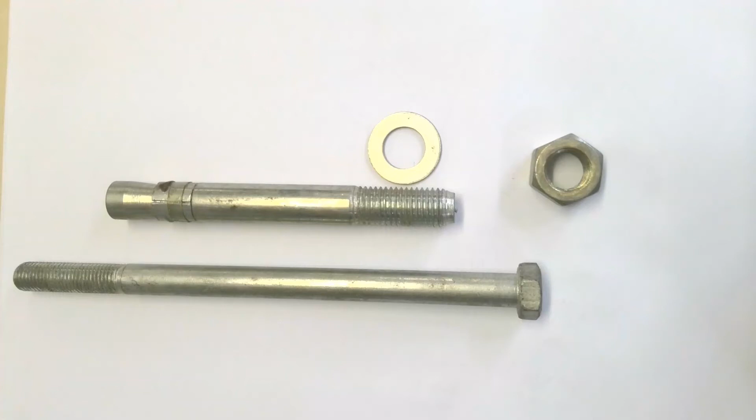Fasteners for assembly drawing. There is a substantial amount of knowledge needed before you can assemble a drawing. Let's go back to our grade 11 work, which is what we're looking at the moment. Remember, all of this assembly drawing is supposed to be in first angle orthographic projection.

So we need to be familiar with all of that. Now, looking at these fasteners, which we are going to engage with before we start the actual drawing, we need to look at the washer, the nut, the bolt, the bolt head, and the threads. Let us start with the washer.

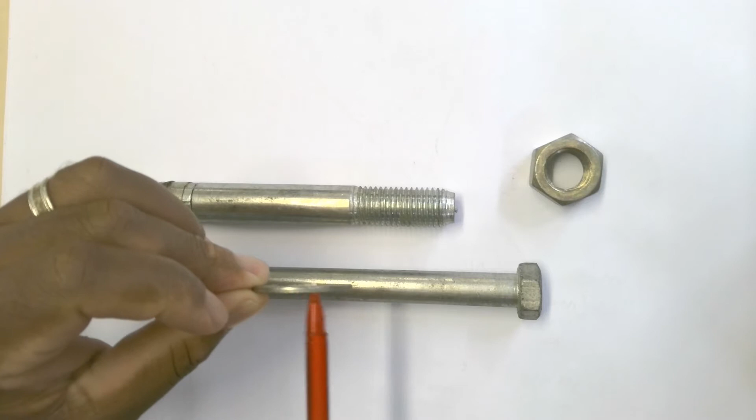If you notice here, the washer has a hole which needs to fit or go through the bolt. That's the washer. And we have the nut again. Now the nut has threads which we call female internal threads. These threads must fit into the male external thread, which is your bolt.

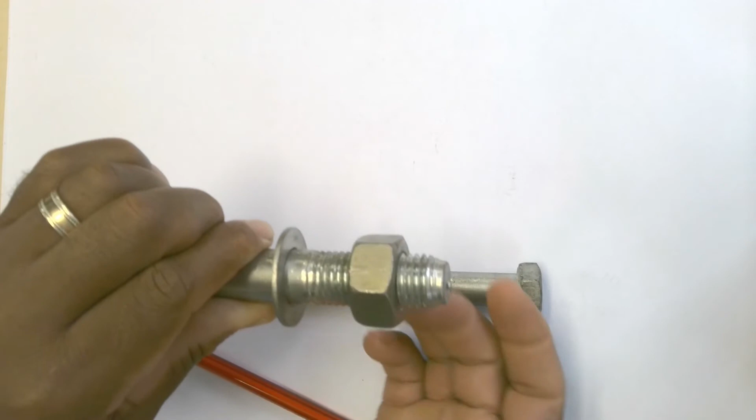How so? We first put in the washer, then we bring in the nut so that it fits onto our male external thread, which is our bolt. Okay, so that's how it works. You'll notice also that here is my bolt, a very long one. It has threads, male external threads.

So how do they represent this to us as a drawing? They give us an M. M stands for threads. I'm going to move this away so that I show you how we're going to represent this in terms of drawing.

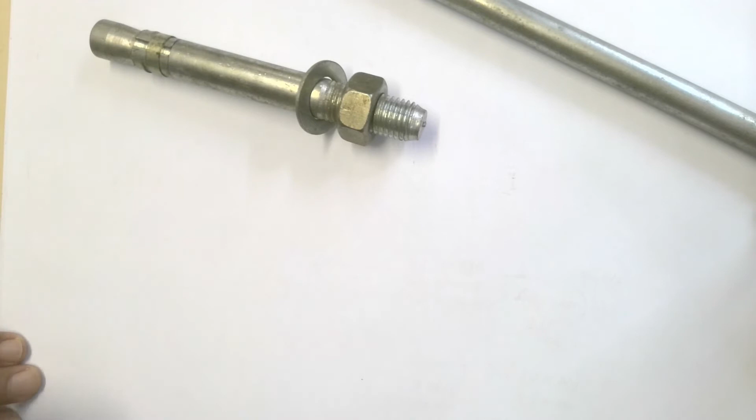So, calculations rather. Let's say they give you M20. Let's move this away so that we focus. Now there is what we call across flats, AF. The formula for that is we must multiply M by 1.5.

There is what we call capital letter T, which is for the nut. There again, M, we multiply M by 0.8. There is what we call small letter t, which is your bolt. That is M multiplied by 0.7.

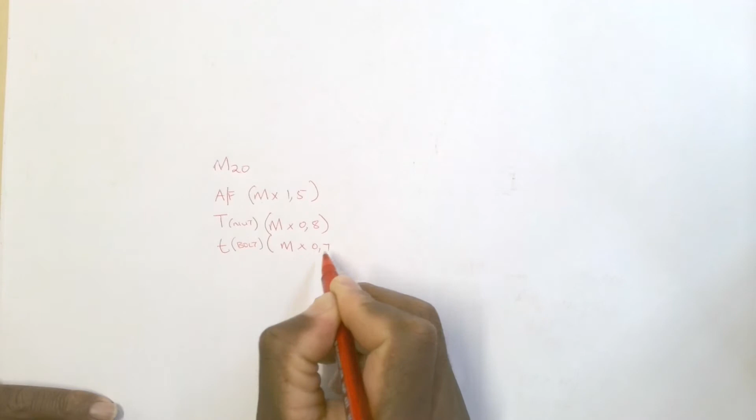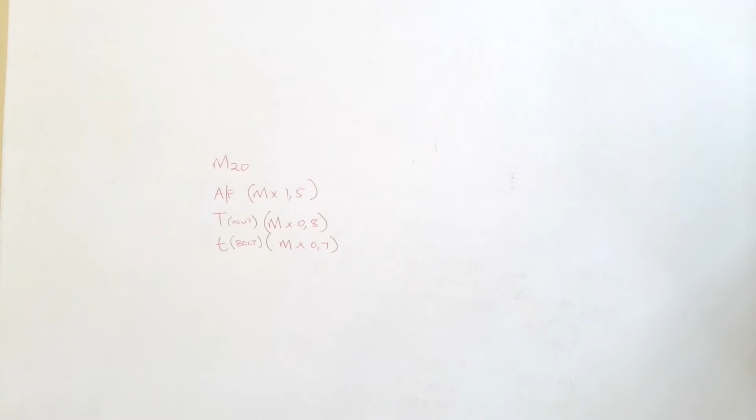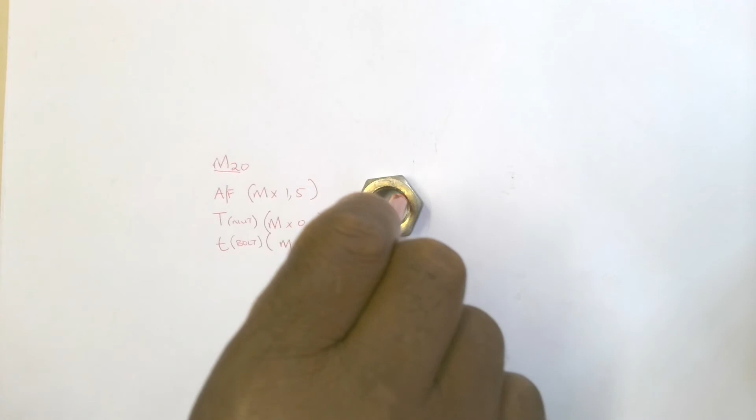It's important that we understand these formulas, because once we lose track of them, it becomes difficult for us to draw, especially in metric. So let's put the nut over there. If I say M20, they are talking about this part here, which is M20, the outer diameter of the threads. That is your M20, if they gave you the nut.

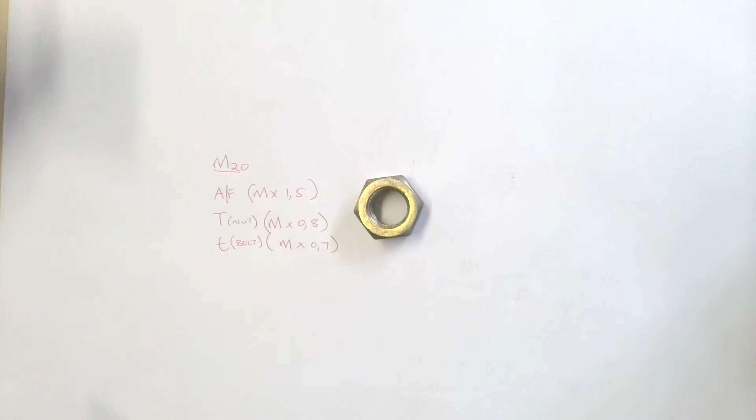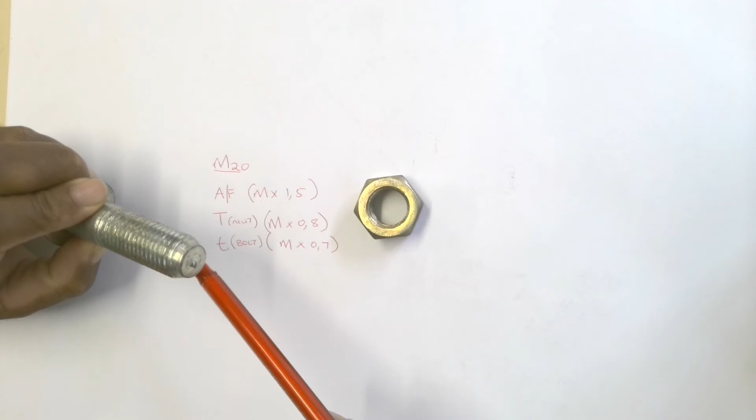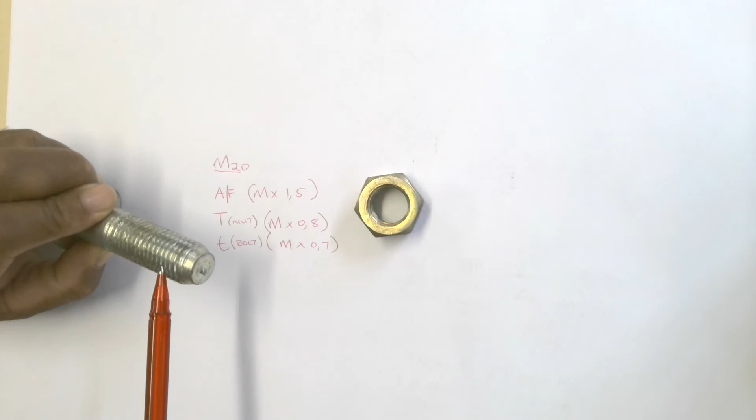What if they gave you the bolt? For the bolt, the M20 will be this external part of the threads. So that will be your M20. Now remember, if this nut fits into this bolt, it means both are the same size. So once they give you M20 there, then you must know that is also M20. Likewise, if they give you M20 for the bolt, it means the M20 for the nut will fit in exactly there.

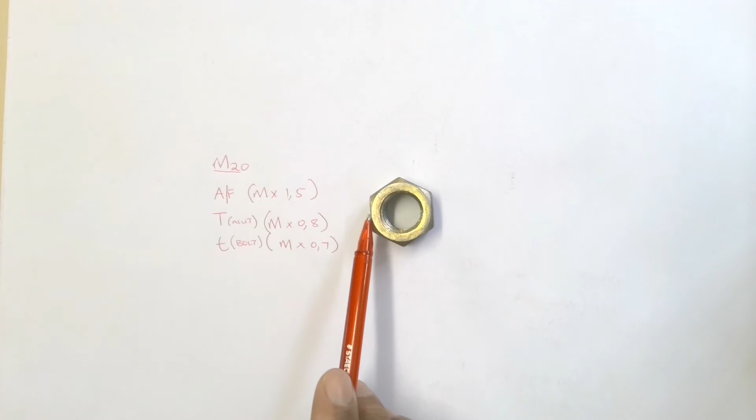All right, so let us start by thinking about across flats. This part here and that part is flat, that surface is flat, flat, flat, flat. So what they are saying is when they say across flat, it means from the flat surface to the opposite flat surface, that is the distance across flat, which you need to work out.

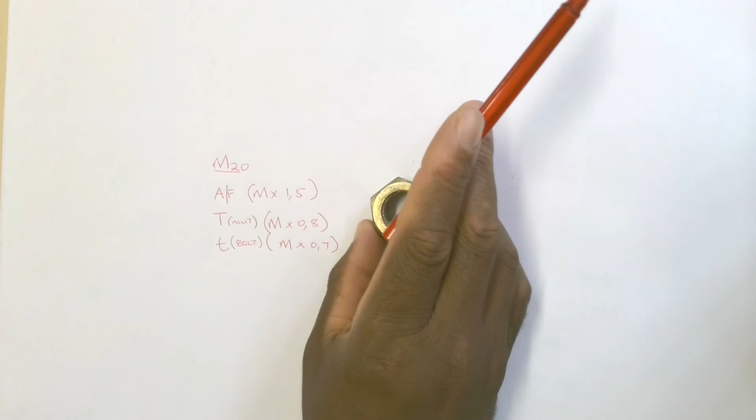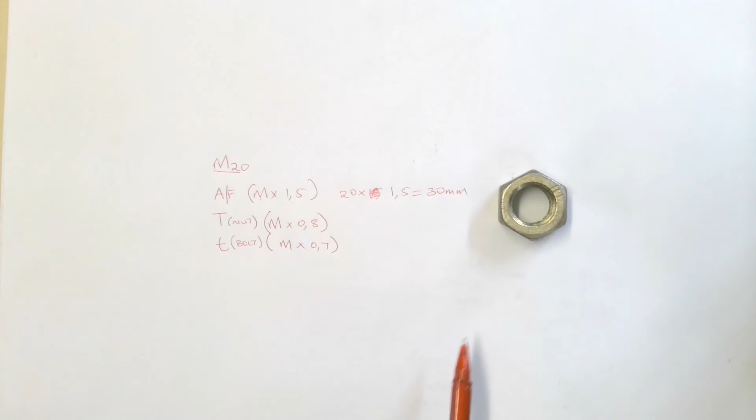Then how do we work that out? Let's move this away so that we are focusing. It means M is 20, so we're going to say 20 times 1.5. Now 20 multiplied by 1.5 should give us 30 millimeters. So it means then, people, from this flat surface to the opposite flat surface, the distance is 30 millimeters.

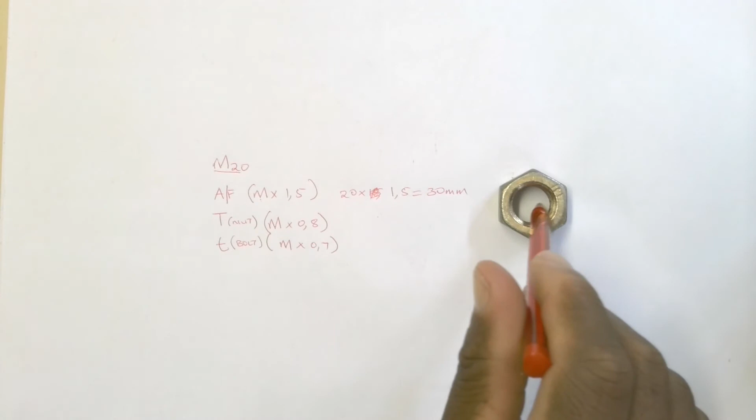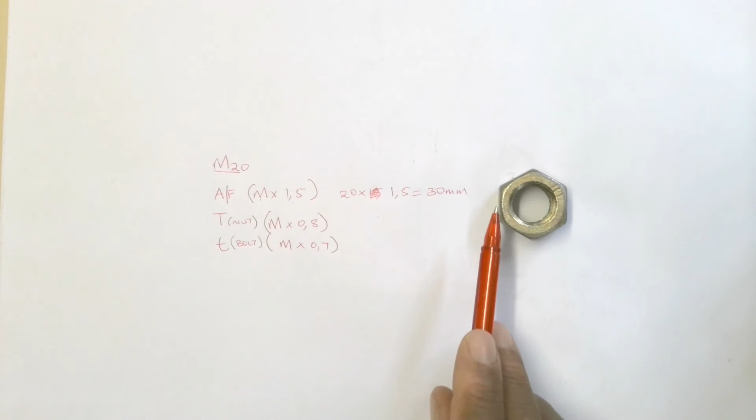How did we get that? We use the M, which is your outside diameter of your threads, be it a nut or a bolt, but it should still give you the same thing. So the distance from there to there is 30 millimeters across flat.

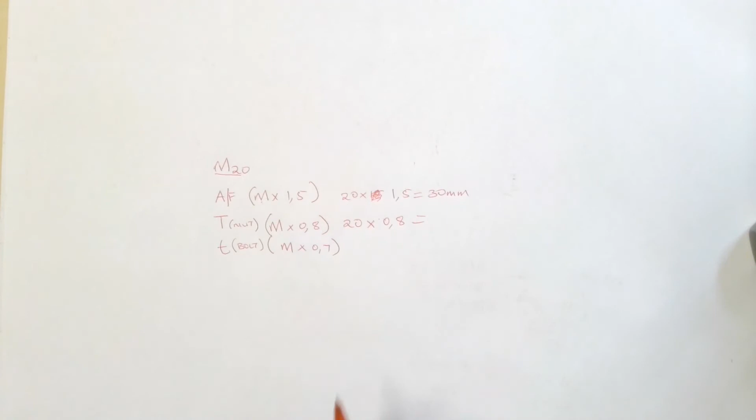Now let us look at the nut, capital letter T, which we multiply by 0.8. So M, which is 20, remember we are given 20 as an example, we multiply this by 0.8, which gives you 16 millimeters. So this here is for the thickness of your nut.

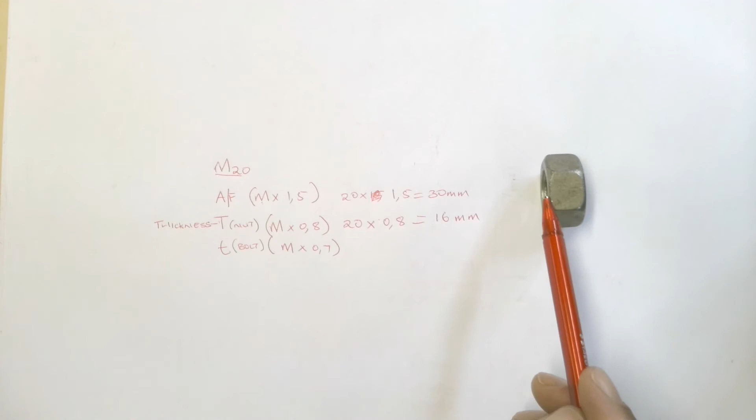Now the thickness which I'm talking about is that if we place this like that, let's put it like that. So the distance from there to there is the thickness that I'm talking about. So this distance is equal to 16 millimeters. That is for the nut thickness.

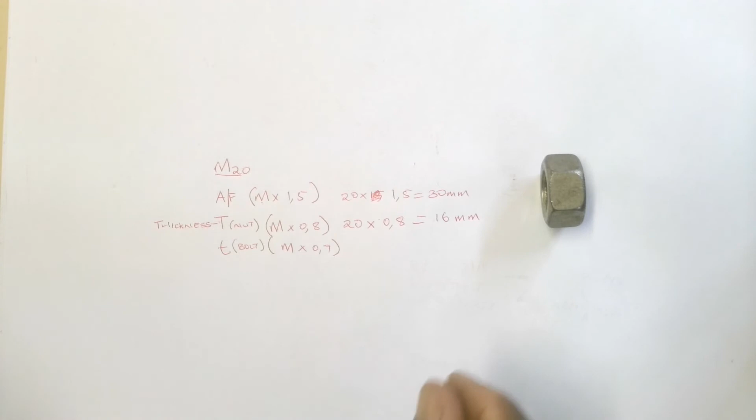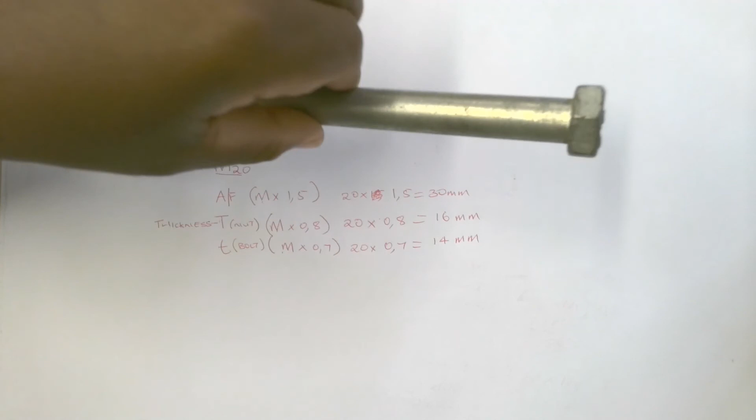Now let us calculate the bolt thickness, which is M again. Using the M20 which we are given, we say 20 multiplied by 0.7, which is equal to 14 millimeters. So it means if I was calculating for the bolt, I need to get that distance to be 14 millimeters. Remember, it's the same thing, it's the thickness.

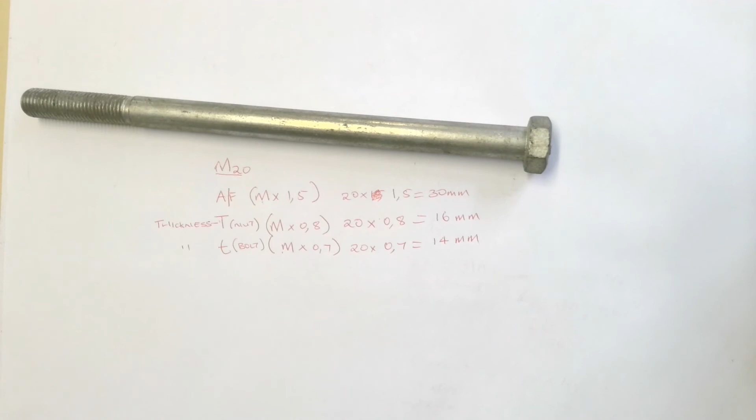And that's how we get our formulas right. Then, threads here, you see, let's put it like that. The threads, they go deep. So how then do we know the distance, how deep do they go?

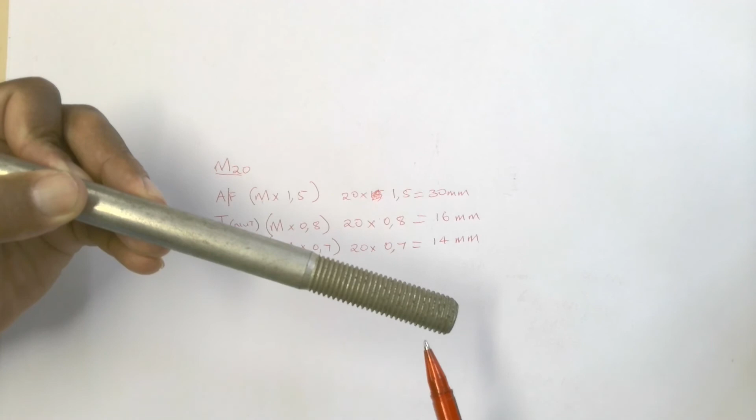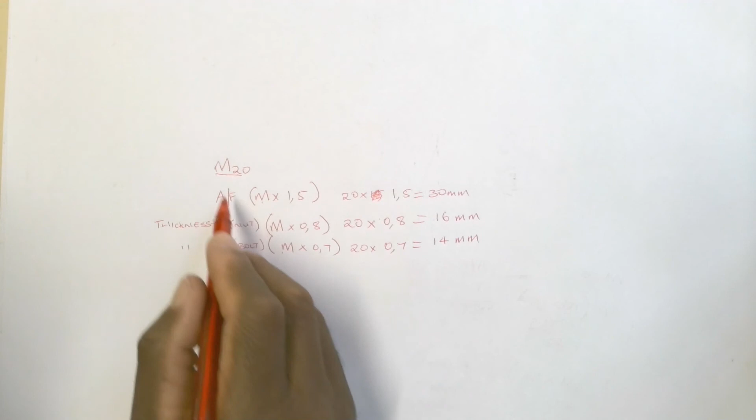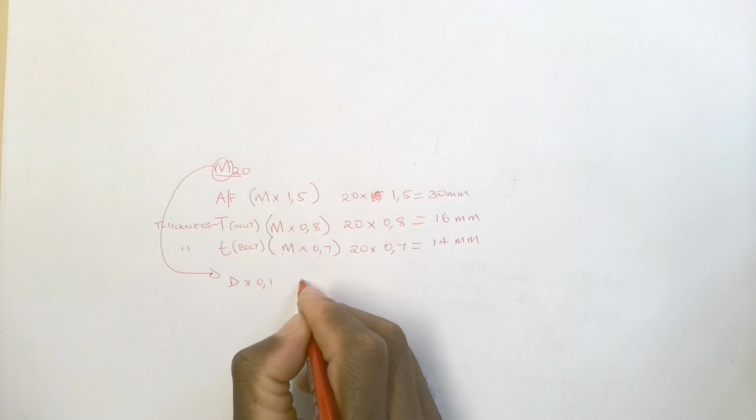We then say diameter. The diameter and this M, it's one and the same thing, it's just that the M indicates that these are threads. So we then say 20, or diameter, let's put it in formula: diameter times 0.1. Then we say 20 times 0.1, it should give you 2 millimeters.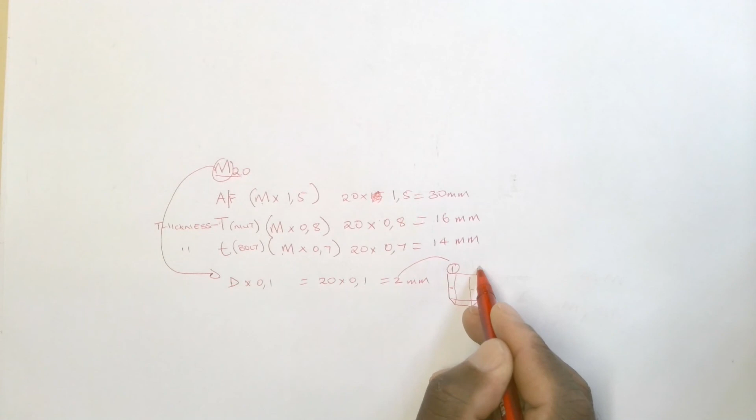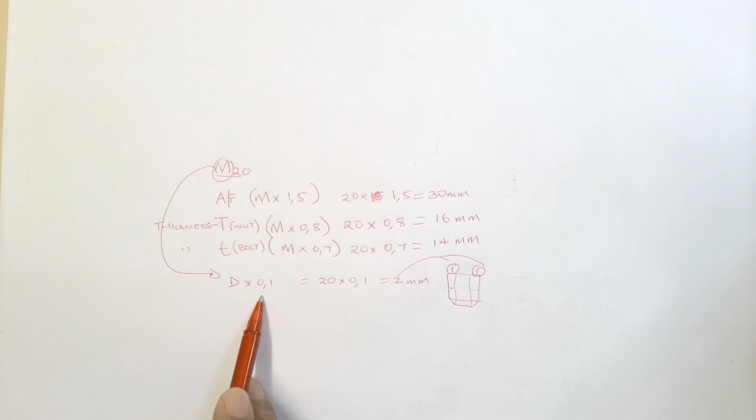2 millimeters. It then says, if you had to draw, that's your bolt, you want to draw the threads. So it simply means that from that distance to that distance is 1 millimeter this side and 1 millimeter on the other side. So all together you're getting 2. We added these two. That's how we get to know that distance from there to there. We multiply the diameter, which is the same thing as M, 20, multiplied by 0.1, then we get our 2 millimeters, then we get to know that distance.

So from now, I'm going to show you how to draw.